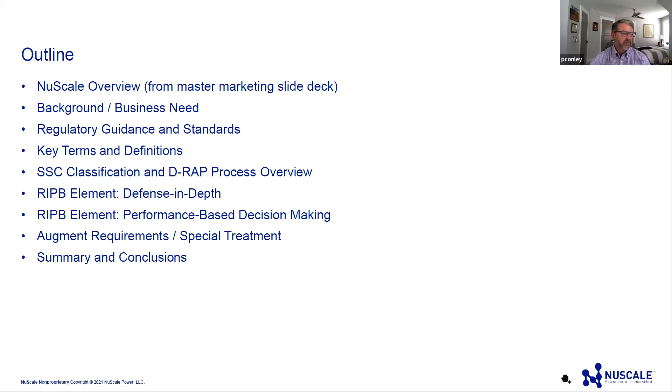So at NuScale, I'm not sure you're familiar with this, but NuScale's mission is to provide scalable advanced nuclear technology for the production of electricity, heat, clean water to improve the quality of life for people around the world. We'll achieve this by providing technology that's smarter, cleaner, safer, and cost competitive.

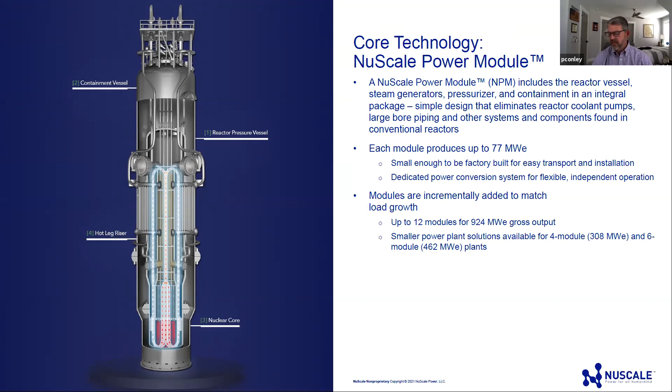As I mentioned, with the 12 modules, you can see they're incrementally added to match load growth. Our flagship design is up to 12 modules, which is 924 megawatts electric gross output. Smaller power plant solutions are available for 4 module and 6 module output needs, depending on the customer's desires. So we are scalable, and that is one of the differences versus the large baseload plants. Next slide, please.

So part of our product offering, as I mentioned, we have the scalable 12 module plant. That design was approved in 2020 by the NRC. We do have the 4 and 6, which is 308 and 462 megawatts. And they have all the features and capabilities of the reference plant, which is the 12 module plant.

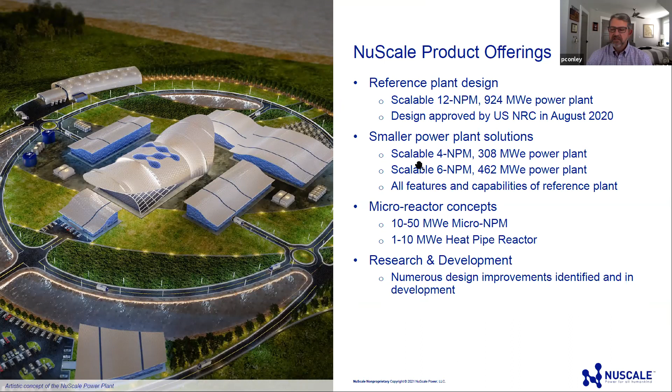We also have work we're doing in microreactors with 10 to 50 megawatt electric micro modules, and then 1 to 10 megawatt electric heat pipe reactors. And we also have various other R&D projects in the works. So innovative company, not just looking at the conventional ways to split the atom. We're trying to be cutting edge and see how we can make this technology work for each of us in a better way. So it is a fun project to work on. Next slide, please.

So this slide here, you can see the climb that NuScale has taken to blaze the trail to commercialization. I know it's a bit of an eye chart, but hopefully you can blow it up when you get the PDF of the slides. As I mentioned earlier, at the bottom you can see the 2000 milestone with the DOE program. 3 bullets up, you can see NuScale was formed in 2007. 2011, then Fluor acquired us, and then step by step.

In 2013, we did secure the first customer. We have a site selection, which occurred in 2016. The DCA was completed and docketed, and then 2020, you jump up, you can see the NRC approved that design. So now we're working into NPM forging and fabrication next year. And then from there, we're going to begin the standard plant design, and we'll be ready for construction. And then beyond that, we're looking at the first plant delivery mid to early 2030s.

So as I mentioned earlier, over $1 billion have been invested to date. You can see the climber there with his foot hanging on the 2020 approval. So a lot of work to do, and it's a steep hill to climb from there, but we're still pushing forward, and we're still excited. So topics like this are important because they're going to help us bring this to fruition in a way that will ensure a more safe and reliable plant operation. Next slide, please.

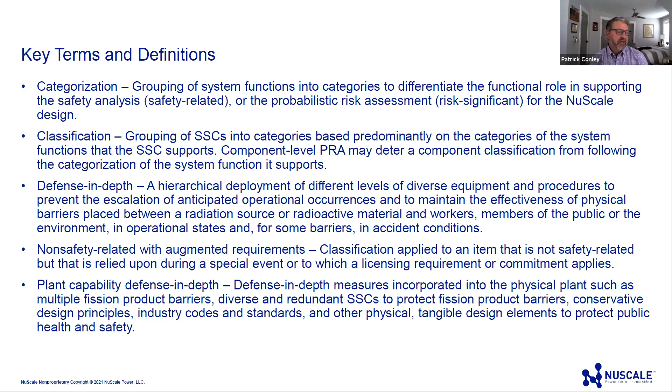And of course, we have defense in depth, which is a hierarchical deployment of different levels of diverse equipment and procedures to prevent escalation of AOOs and maintain the effectiveness of physical barriers. So we have many barriers in place. We have designs and procedures, all sorts of activities that we take credit for in our defense in depth. So, all right, next slide. I won't go over all these. Some of these are probably really familiar.

The next term and definition is the reliability assurance program. It applies to those SSCs that are identified as being significant contributors to plant safety, as determined by using probabilistic, deterministic, and other methods of analysis, including information obtained from sources such as plant and site-specific PRA, industry operating experience, other considerations, and expert panels.

I know at the beginning of the presentation, Prasad, you talked about things just being so deterministic. In this arena here, we are also trying to ensure we can start taking credit for our PRA analysis and values as well. The next term I want to talk about is risk-informed performance-based. You can see there are five elements of that.

The first one is focus attention on the most important activities, establish objective criteria for evaluating performance, develop measurable or calculable parameters for monitoring system and licensee performance, provide flexibility to determine how to meet the established performance criteria in a way that will encourage and reward improved outcomes, and focus on the results as the primary basis for decision making. So that's risk-informed performance-based methodology, and that's what this community of practice is all about.

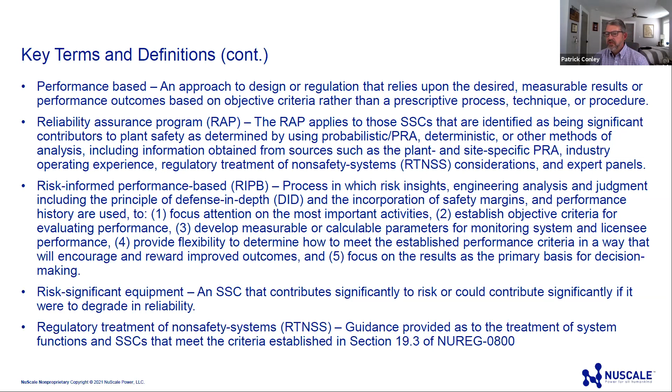And I will point out that that reliability assurance program is actually implemented in two phases: the design, which we are in now, and then the operational reliability assurance program that the owner-operator licensee will have to ensure that those elements of the components that are on the DRAP list are managed and maintained going forward.

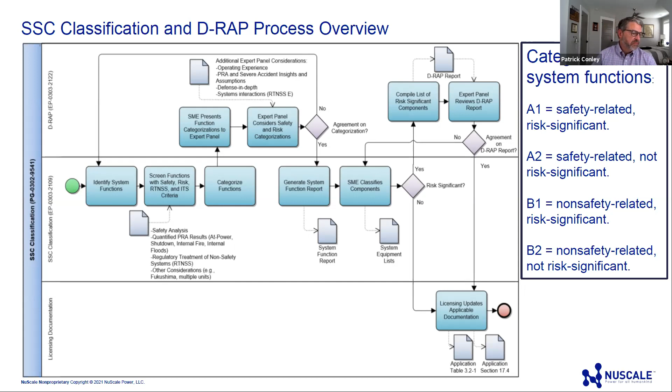So let's talk a little bit about the risk-informed, performance-based element, the defense in depth. As I mentioned earlier on previous definitions, we touched this a little bit, but we've broken this up into 3 categories that we want to discuss. The first one was defense in depth adequacy evaluations. So the approach here was to ensure that we'll contribute specific requirements to the reactor design and operations as determined by the SME and reviewed by the expert panel.

And for each SSC that's presented to the expert panel in the DRAP list, the functional and performance criteria should be clearly identified. Additionally, the expert panel shall perform a defense in depth adequacy evaluation to ensure the collection of SSCs in the summary report and DRAP list that is generated provides multiple layers of defense in response to internal and external initiating events. This is where the expert panel's collective wisdom comes in.

We have safety analysis, operations, design engineering, licensing, and we look at this holistically at each layer to make sure that we've appropriately evaluated it and that the SSCs will perform if they're on this list, and we have reasonable assurance that that will happen and it's categorized appropriately.

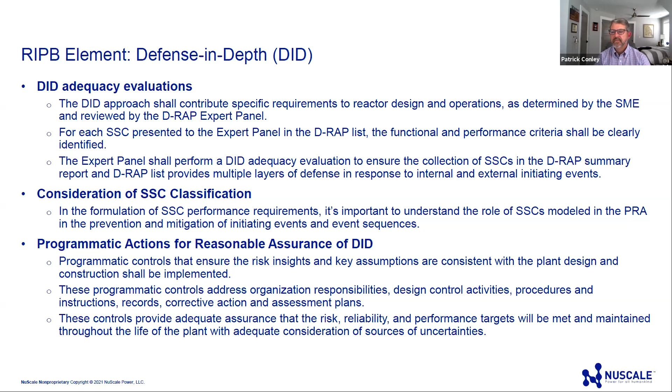Okay, thank you. So the next element I want to talk about is performance-based decision-making. Decision-making during expert panel deliberations should be based on criteria specified at the highest level that is feasible to meet functional objectives. This enables maximum flexibility for realizing successful system performance. So when we look through the objectives of the criteria, it should be based on the functional objectives of the component and the system that it is serving. And we need to make sure that the decisions are correlated to ensure maximum system performance.

The performance-based decision process should have the following characteristics that we've determined, which is consistent with ANS 30.3. That the objective criteria to assess performance is based on risk insights, deterministic analysis, and performance history. Quantitative and qualitative risk-informed performance-based decision criteria to support transparent and repeatable decisions. Part of that, recognition of different levels and types of defense in depth when considering alternatives, including evaluation of safety margins, as I mentioned earlier. Evaluation of trade-offs on plant capital and operation costs versus risk reduction. That's the world we live in. We can have the safest, best plant, but we can't build it if it's too expensive.

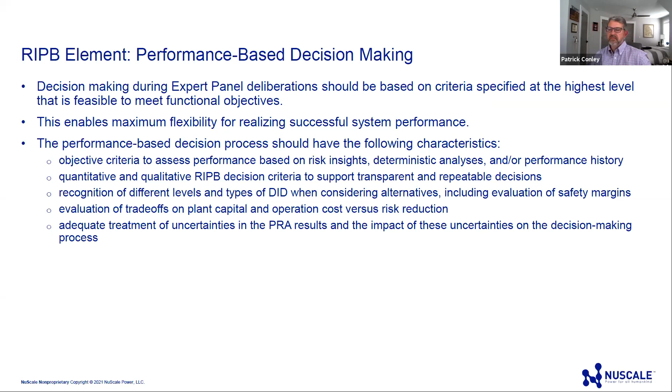So I walked you through the SSC classification process, some of the defense in depth, the risk-informed performance-based criteria and characteristics. And now I want to talk to you about how we've transitioned from the treatment of the non-safety related components. So we did a review of our process, and I mentioned earlier we were using the term important to safety, and now we're transitioning away from that to non-safety related with augmented requirements.

So we looked at the bases of the documents and the collection of documents that were there, the background, the references, and of course used our collective knowledge and benchmarking from the industry. We came up with a set of criteria that we followed. So for those B1 and B2 components that I mentioned earlier that were not safety related, we would screen those against a set of questions or screening criteria that we came up with.

And the screening criteria basically takes you through a series of 3 questions, and any question can make you classify a component as non-safety related with augmented requirements. If each of these questions is answered no, then it's not non-safety related with augmented requirements. But the first question is, is the non-safety related function subject to specific regulatory rules?

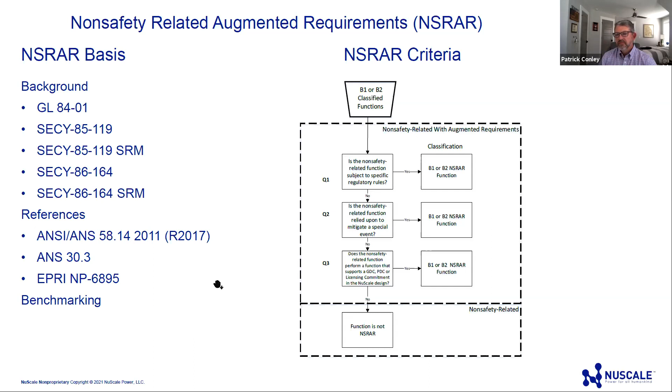So our list creation, as I mentioned earlier, we screened the previous component list against the formalized criteria, the screening questions, excuse me. And we capture the basis for each of the functions as it's categorized against the screening criteria. So if it was an augmented requirement due to question 1, we would state the bases. If it was question 2, we'd state the bases and why, et cetera.

So we also have, through the list creation, a multidisciplinary iterative approach where we walk through that process with the SME and stakeholders and management. So the end result of that process is to present a list that's been rigorously created based on functions developed with the formalized criteria. This takes some of the uncertainties out of it. And it allows us to repeat the list and follow a process that is defendable and repeatable, which is key in our reviews.

And lastly, it enhances the accessibility of NuScale design and licensing basis to the outside stakeholders. We found that external partners and people outside of NuScale may not have understood the process as clearly as we did, which of course makes sense because we implemented it, but this allows someone to take the information, follow the screening, see the bases, find out what the augmented requirements are, and it's based on the system function that it serves, and then it correlates back to the process that we outlined.